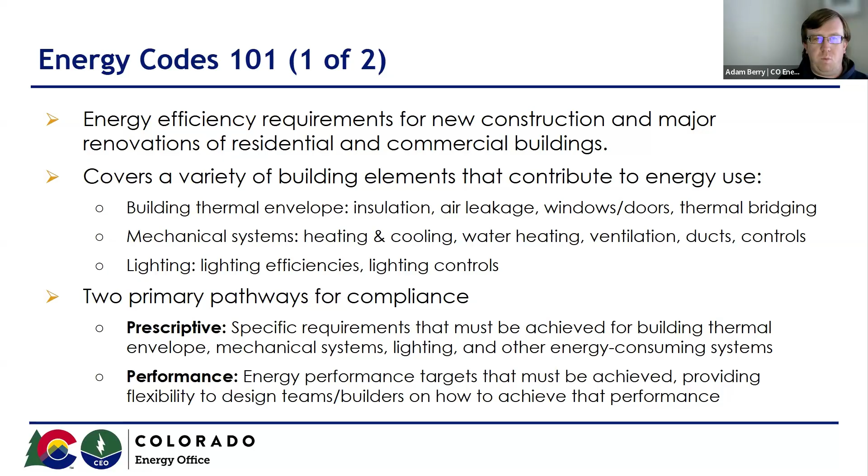There's also the performance-based approach, which has some prescriptive requirements that you must meet, but largely is just energy performance targets that are identified through energy modeling, and then verified through actual on-site inspection of installation of those modeling assumptions. So that's generally how the energy code has always worked. These are the elements that the energy code has always addressed, and this has been true for decades now. And we continue to address a lot of these issues through our state energy code as well.

But there's also a number of newer issues that are starting to be addressed in the energy code. And I think they generally tend to move in the direction of decarbonization as opposed to just strictly energy efficiency as the energy code has done in the past. These types of things relate to electrification. So encouraging adoption of those high efficiency heat pumps, heat pump water heaters, induction stoves, heat pump or otherwise electric dryers. If you don't already use those, which I think most people do, but there are still some gas versions out there.

Renewable energy. So while the energy code has generally always focused on reduction of the consumption of energy within the building, it's also starting to address not only the energy consumed by the building, but also potentially the energy produced by the building. So there are opportunities to consider renewable energy, both requirements and options, within the energy code.

EV charging is another one. I think we all are probably fairly familiar that EVs don't have the traditional fueling approach that internal combustion engine vehicles do. Most charging is done at home or at work. And so therefore we need to make sure we are incorporating requirements for EV charging in our energy code and making sure they are being incorporated into our buildings.

And then I threw this last one on here, and you can see it's noted that it's not actually in our state energy code right now. But there are also some considerations for embodied carbon. For those who are not familiar with embodied carbon, that's basically the carbon associated with the production, transportation, construction and disposal of building materials. So all of the emissions associated with all of those different phases of life for materials that go into our buildings.

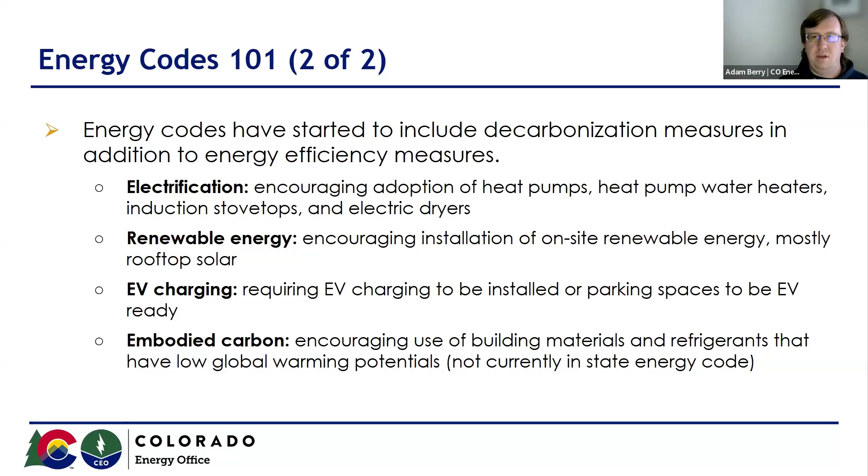And so where does the state energy code play into the broader ecosystem in Colorado? I think you all know that we are a home rule state, and therefore building codes and energy codes are adopted locally. So Routt County and all of your municipalities adopt the energy code, and then the county enforces that code for you.

And so the state creating this new state energy code is a little bit of a different approach than has historically been taken in Colorado, where it requires that any jurisdiction that updates or adopts any building code to adopt whatever the state minimum energy code is, or something more stringent than that code. And so you can see we've had multiple laws taken into effect over the last few years. It started way back in 2019.

And the most recent law that is currently in place took effect on July 1st of 2023, basically saying that anytime a jurisdiction updates their energy code or their building code, they must adopt at least the 2021 International Energy Conservation Code, plus the electric ready, solar ready, and EV ready requirements that the state has previously published a couple of years ago. I'm very happy to say that Routt County has already met this threshold. You guys are already doing this, which is great.

Really appreciate the leadership that we're seeing in your region in implementing these pretty advanced energy codes early in the process and not waiting to do it until someone forces you to. So we're really excited about that. And Paul mentioned Todd Carr, and you guys have a really great building official in your region, and he's very motivated to help support advancing these codes and really doing what it takes for the community to implement them effectively. So really excited to see that.

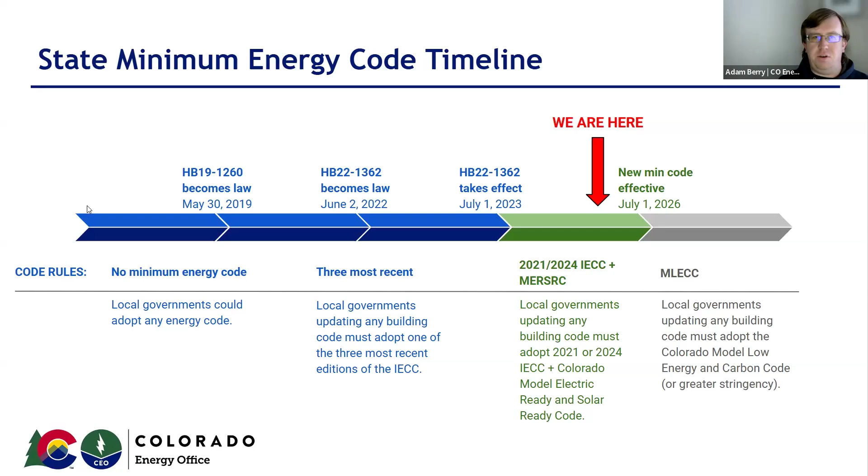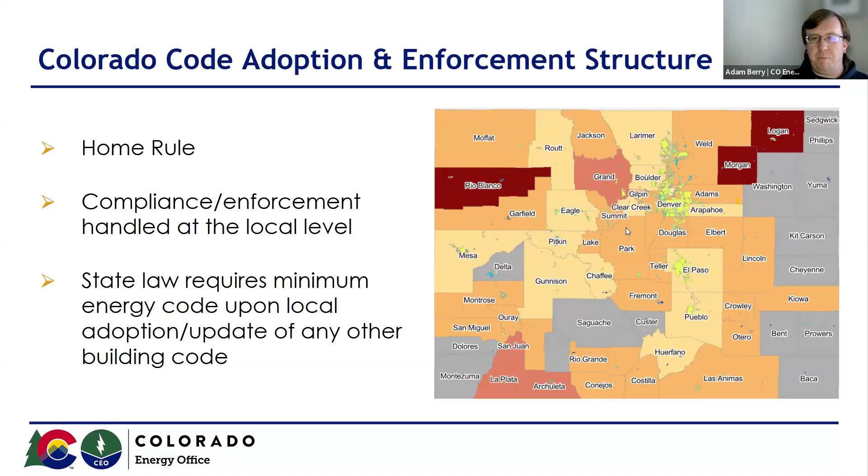So talking about the low energy and carbon code itself, as I mentioned, this is the new minimum energy code, goes into effect July 1st of next year. It will replace the current minimum energy code, which is that 2021 IECC, and the state's model electric ready and solar ready code, which you all have already adopted.

The new energy code is based on the 2024 version of the IECC, although it is fairly heavily modified in many ways. So there are many elements of the IECC that will remain, but some Colorado specific changes that we'll talk about. We published the amendments to the 2024 IECC, so the list of amendments that we have developed as part of this low energy and carbon code, on September 2nd.

And we are also going to be working with the International Code Council to produce a formal Colorado energy code as well. So it won't just be a package of amendments that the building department and all of you will have to work with, but it will actually be a consolidated code.

There are two really main focus areas or priorities that the legislature directed the state to take into account when developing the requirements of this code. One of those is very much in line with, I think, what all of you are here for, which is maximizing emissions reductions from our new construction. And then the other was to make sure we are prioritizing housing affordability in making the changes that we make. So those are two overarching themes you will see fairly consistently as I talk through the different changes today.

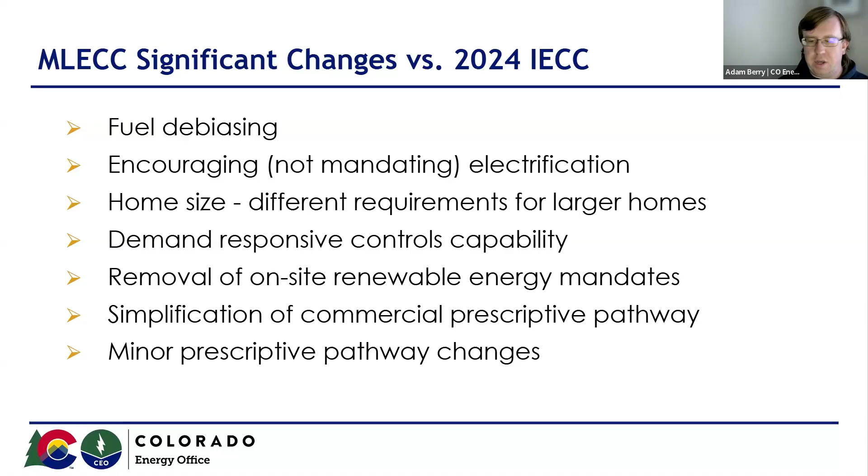On-site renewable energy requirements and mandates that exist in the 2024 IECC have been removed, so there's no longer mandatory on-site renewable energy requirements. And then we've made some simplification of some of the compliance options and made some other prescriptive changes that I won't spend too much time on because they're smaller changes, but I'm always happy to address any questions folks have about those. So we'll jump in first to the main first topic, fuel debiasing.

So what do we mean by fuel debiasing? If you have worked with the energy code for a long time, you will know that there are different requirements in the code based on whether or not you utilize fossil fuel-based equipment or whether you utilize all electric equipment. There's a couple of different ways in which that presents itself. One of the ways is in that prescriptive pathway of the energy code. There are minimum efficiency, minimum performance requirements for HVAC equipment, water heating, all those appliances and equipment, as I mentioned.

And I think, as is pretty common knowledge now, heat pumps and heat pump water heaters are able to achieve higher efficiency levels, higher performance levels than their fossil fuel counterparts. And the federal minimum efficiency requirements, which is what the energy code bases those minimum efficiency requirements on, are distinctly different depending on whether you're talking about fossil fuel-based equipment or all electric equipment. The federal minimum efficiency rating for a residential natural gas furnace, for example, is 80% efficient. So 80% of the energy within the natural gas is converted into heat in that system.

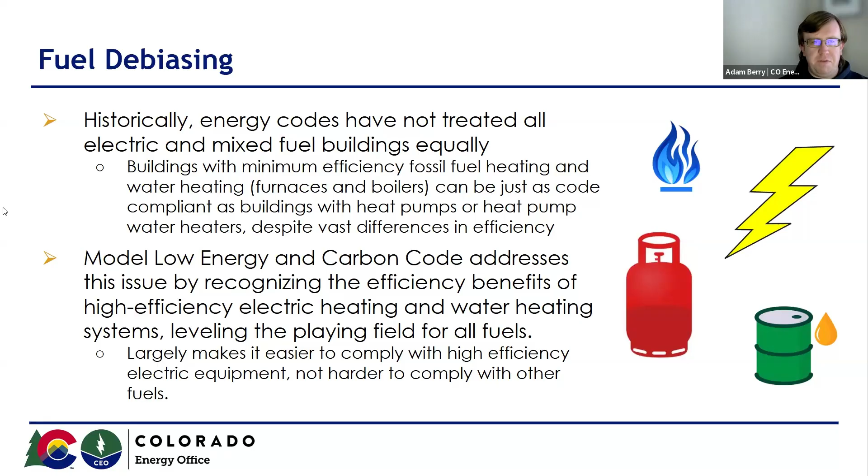We no longer want all electric projects to have a harder time complying with the energy code than mixed fuel projects do. And historically, they always have. And so this code levels the playing field in a couple of different ways. One of the ways is within that performance-based pathway. As I mentioned, the energy code historically has based modeling on energy costs of a proposed project versus a baseline. And now we have transitioned that to be the energy consumption of the proposed project versus the baseline.

What this does is it essentially eliminates any bias that cost differences between those fuel types provides. A unit of energy is the same whether it's coming from a unit of natural gas, a unit of electricity, a unit of propane, or other fuel types, oil, whatever fuel you may be using. One British thermal unit of energy is one British thermal unit of energy, and that is true across the spectrum. And so it takes out that bias that the energy cost option essentially implemented against all electric properties.

It also provides a greater consistency. So regionally across the state of Colorado, as well as across the United States, energy costs vary significantly. In the Front Range, we have very different energy costs than what you all have up in Routt County. And what those look like in Pueblo and other parts of the state are all very different. And so basing a compliance criteria on a moving target like that is really challenging from a consistency perspective. It makes it very difficult for designers and builders to operate in multiple jurisdictions where those costs range wildly, and maybe one design in a particular community doesn't work in another community because those energy costs are different.

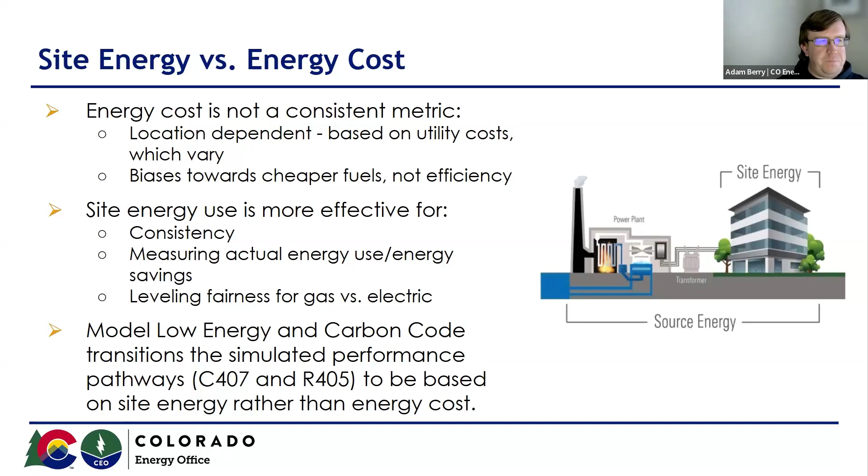And so this gets us into this encouraging electrification topic. So I said I'm going to beat the drum about the fact that we are encouraging and not mandating electrification, and I'm going to keep beating that drum. If there's one major thing I want you all to take away from this, it's that encourage, not mandate phrase there. And the way we're doing that is twofold. One, making that IECC base code more fuel neutral by reducing the requirements essentially that applied to those all electric properties relative to their gas counterparts. And so that is creating that fuel debiasing, creating that fuel neutrality.

And you have to do that in different ways in the different pathways of the code because the code treats buildings differently, as I was kind of describing. And so within the prescriptive pathway, the way we've addressed this is essentially providing more credit for properties that use heat pumps to recognize that efficiency difference that you are seeing from that heat pump relative to the lowest efficiency equipment that you could have put in that building.

So if the code basically says the worst you can do is put in that 80% efficient fossil fuel furnace, then the code will say if you put in something better than that, like a heat pump, then you will get extra credit towards compliance with the code by doing that inherently just by choosing that equipment. Even if it still only meets the minimum efficiency that a heat pump is required to achieve, we're still trying to recognize the difference that efficiency gain gets you.

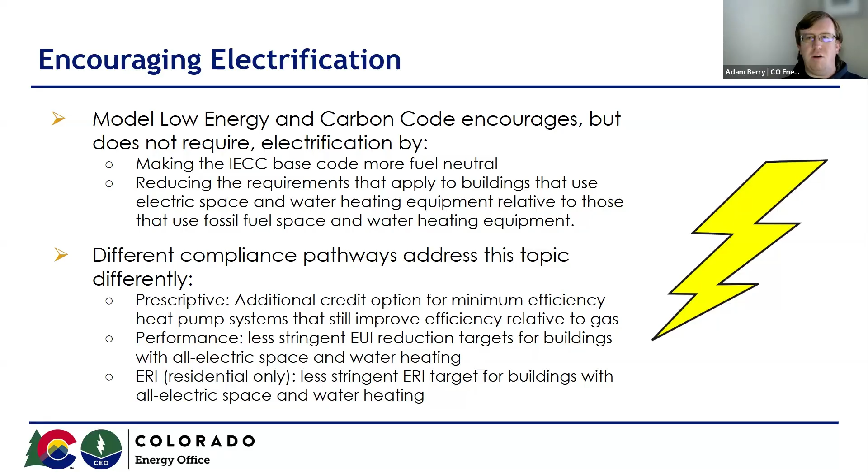So next I'll dive into, on the residential side, this home size discussion that we have been talking about for some time. I think there are a number of jurisdictions in Colorado, and forgive me, I'm not sure if Routt County is one of them. I believe I see Paul nodding his head, so I think you are one of them. But we've seen this pretty consistently in a number of our mountain communities across the state, addressing different sizes of homes differently when it comes to their energy performance.

There's a lot of different reasons as to why we do this. Affordability is one of the most important ones. We really want to make sure we are factoring in as low of a first cost as we can for those smaller starter home, affordable units. We still want energy efficient homes. We still want to encourage electrification of those homes, but we want to try to minimize the first cost impact that this code will have on that sector of housing.

We don't care as much in the larger homes about affordability because, generally speaking, somebody who's building a 5,000 square foot home or a 7,500 square foot home, or God forbid, things larger than that, which I know you all see up there, generally speaking, affordability is probably not the main thing on their mind. And it's not the main consideration that they are taking into account when having to comply with this code.

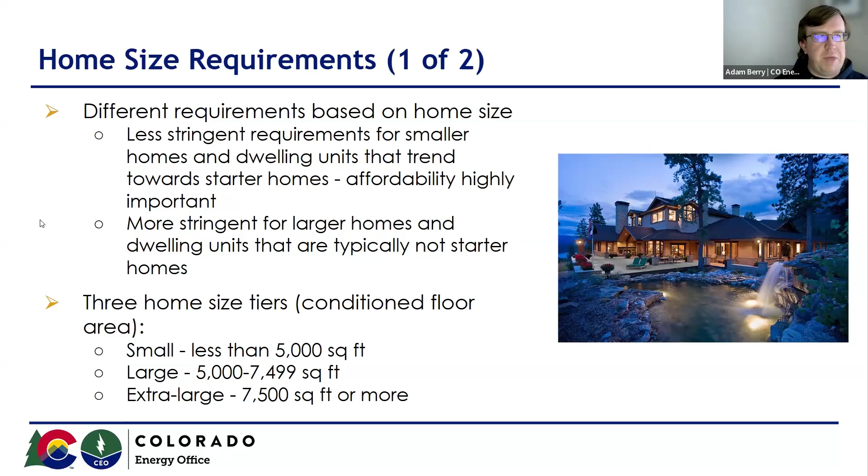That middle tier, or what we're calling large here, is anything between 5,000 and 7,499 square feet. And then anything above 7,500 is going to be considered an extra large home. And the requirements of the Energy Code are going to continue to increase as you go up that scale. So what are we looking at? What do we think is going to happen to each of those properties as that size increases?

Keeping in mind that when I talk about the level of stringency or level of efficiency gain we anticipate seeing here, this still accounts for that fuel debiasing and policies encouraging electrification. So this is in addition to that. So that smallest tier, from an energy performance perspective, we expect that to largely align with the 2024 Energy Code's performance level. So if you were to build a home under the 2024 IECC, chances are it would perform about as well as a smaller home under our code would perform.

For that large tier, that 5,000 to just under 7,500 square feet tier, we're anticipating, depending on the compliance path, whether you're doing prescriptive or performance or the HERS rating method, there's 3 different options in the residential code. But across those different pathways, somewhere between a 7 and a 10% efficiency improvement through increased envelope upgrades, higher efficiency HVAC equipment, things like that.

And then that extra large tier is going to require net zero operational energy. And what the Energy Code requires for that is a pretty high performance threshold from an energy efficiency perspective. So maximizing the performance of your building thermal envelope, having highly efficient equipment, really efficient lighting, really robust controls in place. And then whatever energy use you have remaining, you have to design an on-site renewable energy system to offset the remainder of that energy use. So inherently, you are net zero. You are generating as much or more energy from an on-site renewable energy system to offset the energy consumption.

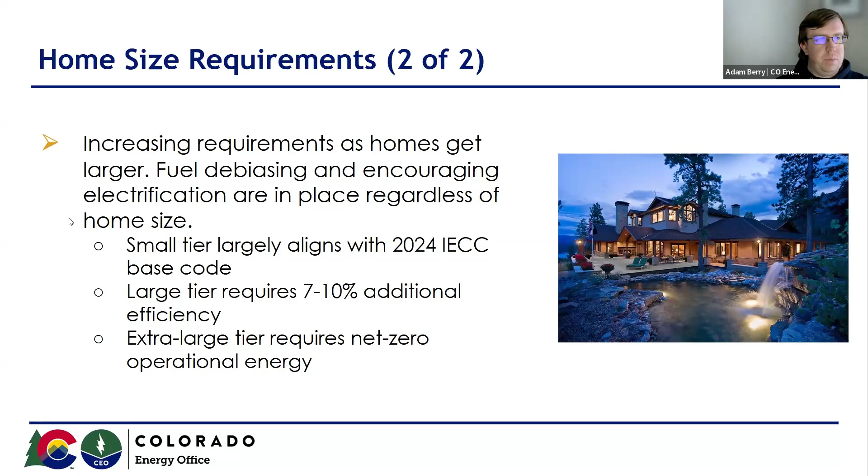Getting next into demand response and renewable energy. So I mentioned our main goal with demand response is really grid management and opportunities for utilities to be engaged in active management of the electric grid as we continue to see higher rates of electrification. And what that looks like is equipment, as I said, that is capable of participating in a demand response program.

So demand response means usually, when a customer opts in to a demand response program, the utility has the ability to come in, and if you're in the middle of the winter and your thermostat is set at 74 degrees, what the utility might do during a peak event, which means higher demand generally than you're able to meet with your electricity generation resources, they will actually be able to adjust your thermostat down a couple of degrees so that your equipment turns off temporarily.

Or if you have, for example, a multi-stage heat pump, it might be able to reduce the power or reduce how much output that heat pump is giving you to reduce the electricity demand that it is creating. This is true for HVAC systems, water heating and lighting systems in commercial buildings. And on the residential side, the code only requires this for water heating systems.

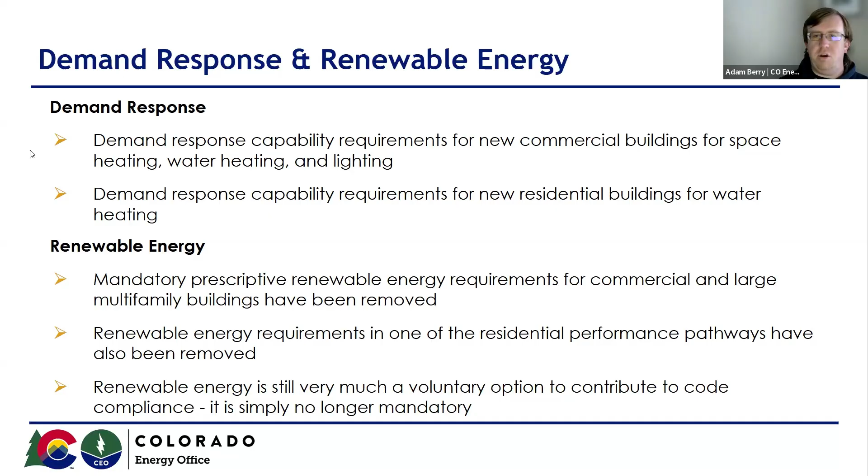So I mentioned earlier that, and I think you all are probably aware, seeing as Routt County has adopted these requirements, that electric, solar, and EV ready requirements are already part of Colorado's minimum energy code. So I won't spend too much time talking about these, but just to note that the low energy and carbon code has actually updated a few of the requirements.

So when you adopt the low energy and carbon code, there will be some revisions, some improvements to these requirements that we implemented in the new code to try to learn from some of the early experiences that some of our jurisdictions and our projects were running into when complying with these requirements. And so we have made some adjustments to make them a little bit easier to comply with and clearer as to what the requirements are. So again, if there's any questions about what those changes are, I'm always happy to talk about them. But just so you are aware, there are a few updates to those.

And then I mentioned at the top, one of the things that we tried to do with this code was recognize how complex building codes in general have become, and that is applicable to the energy code as well. When the energy code was first published, I think it was somewhere in the neighborhood of like 50 pages, and now the energy code is somewhere in the neighborhood of 900 pages, 800 pages. Very, very long code with a lot of requirements in it, and has become more and more complex over time.

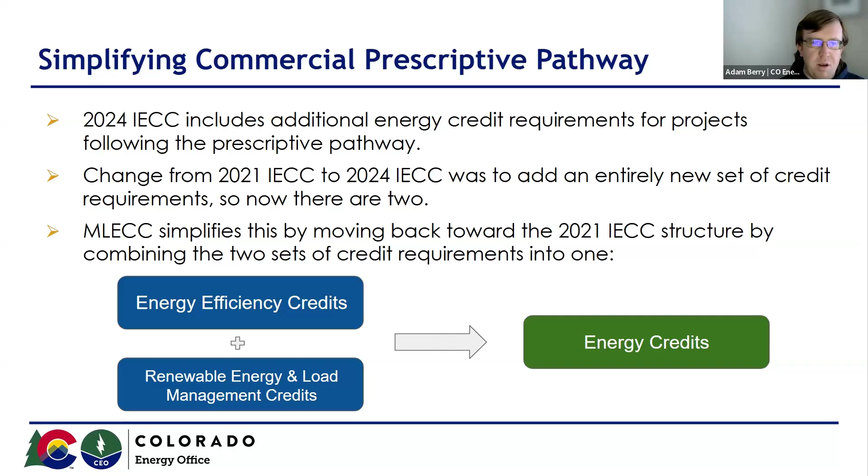And so one thing that the Energy Code Board did was say, well, we like the way that the 2021 IECC did this a lot more than we like the way that the 2024 IECC did this. 2021 was a lot simpler, it was a lot more straightforward. And so we have basically modified these additional new categories of these credits, as you can see on the left, and we combined them all into just one set of credit requirements, similar to the way it is in the 2021 code. So again, taking something that was more complex, making it simpler, but still ultimately achieving the goals that we want to achieve.

And so I just wanted to talk about how, I talked about all of these things about we want to encourage electrification. We really want highly efficient buildings. We want all of these things. And a lot of people ask me, how do we know whether your code is going to actually do what you think it's going to do, or what you wanted it to do?

And so we have done some preliminary, the Energy Office itself has not done it. We've worked with an energy modeler who actually was a member of our Energy Code Board to do some initial modeling of a few different scenarios of projects that they are working on today. So I can't talk too much about the specifics of these examples because they are actual projects that are being worked on.

But we were looking at those projects to say, okay, they were designed under the 2021 Energy Code. They looked at what would it take to make these same projects compliant under the 2024 code or the state's code, and which of those is easier and which of those yields better outcomes. And what we've learned is that at least with those projects, which are largely on the commercial and larger multifamily side, and the caveat is that they are in the Denver metro area, so they're not in climate zone 7 like you all are.

But we saw that what this code actually results in is exactly what we were hoping it would result in. A lot of projects are going to have an easier time complying under our state code using high efficiency electric technologies than they would have had under the 2024 code. It reduces the unnecessary costs for those mandatory on-site renewable energy systems. It balances the need for efficiency with the need for decarbonization. And it still provides flexibility.

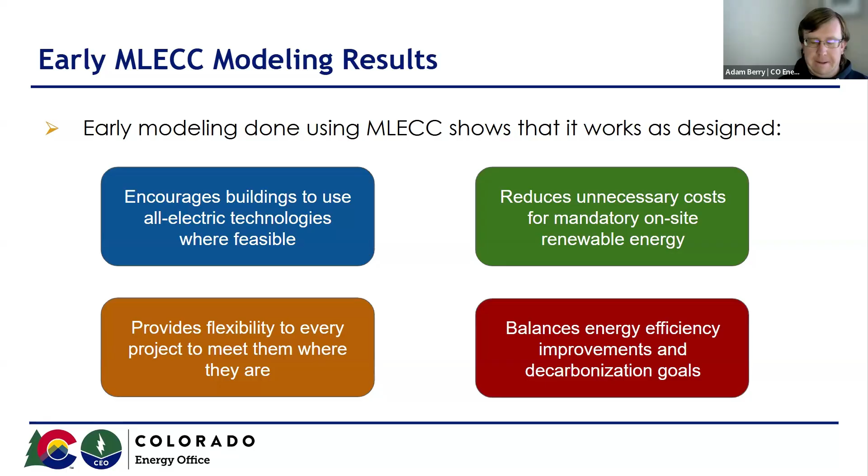So just to give a couple of examples of models we did, and I focused mostly on multifamily because Paul enlightened me yesterday that most of the new construction you all are looking at in your region is probably going to be in the multifamily sector. And so I picked out the two examples that are in the multifamily sector. The first was an affordable multifamily housing development in the Denver metro area, one built under the commercial code.

So one of the weird nuances of energy code is that some multifamily is considered commercial if it's high rise, and some of it, if it's low rise, is considered residential. So it's a little bit wonky. And I picked out one example from each.

So a larger multifamily property that would be governed under the commercial energy code was basically planning to use a 2021 IECC building envelope plus mid-efficiency heat pumps. So not the worst efficiency they could be, but also certainly not the most efficient heat pumps out there on the market. And then either they were going to use a high efficiency gas domestic hot water system or electric resistance domestic hot water system.

This would have been really difficult to comply under the 2024 IECC. It was highly unlikely that you would be able to show the energy savings necessary or the energy cost savings necessary to comply with the 2024 code because of all these electrification elements. Even though you're still achieving a pretty significant energy cost savings, the baseline you're comparing to also had a relatively significant energy cost savings, without going into all the complexities of how you do modeling under the energy code.

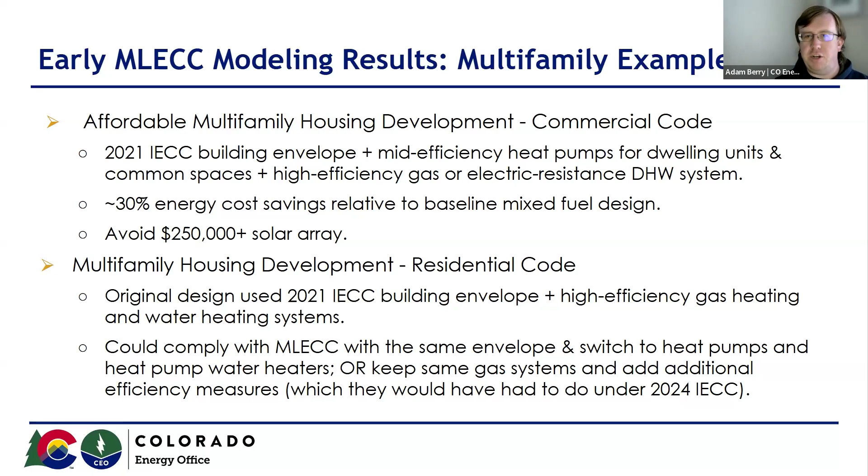So this is very early days. We have had, I believe, one jurisdiction in the entire state that has adopted this code or something similar to it. And so we don't have any real world projects that have gone through design and permitting and construction that we can actually go back and look at yet. But hopefully within the next couple of years, we will have some projects we can start going back and looking at. But for now, we at least have this kind of initial analysis showing us that we seem to be on the right track for what our goals are with this code.

So that's all I have. I guess I took a little longer than I had planned, but I think we still have a little time for some questions and discussion about it. Yeah, thank you, Adam. Michelle, how do you want to manage the questions? I can look for hands, or you want to do that? And I don't see anything in the chat, so maybe I can't see everybody, so that makes it hard for me to see who's asking without stepping on each other. Okay, I don't see any hands raised or anyone in the chat, but we have some follow-up questions, and I'm sure some people do. So if people have questions, you can turn your camera on. That's a subtle sign, or raise your hand and we'll call on you. But Paul, you can get us going, and I'm sure people will have questions as we go along.

Yeah, Adam, one question that comes to mind, not necessarily by names, but what kind of representation is on the Energy Code Board? Yeah, I can give you names too. That's very public, but the representation is pretty broad. It covers all sectors of the building industry. On the commercial side, design engineers, architects, energy modelers, solar and energy efficiency experts, builders. And on the residential side, we also have home builders and folks not only representing the home builders themselves, but also organizations that build both affordable and market rate for sale and for rental housing. So pretty robust representation from the building sector.